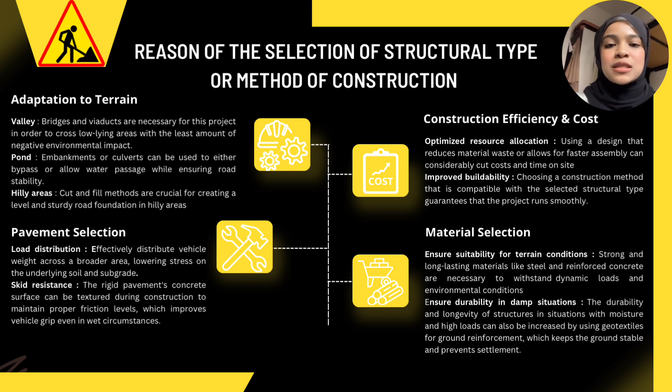Other than that, skid resistance. Skid resistance refers to the pavement surface capacity to provide enough friction to avoid vehicle skidding, especially in wet weather or in regions prone to water collection, such as around pond crossings along the alignment. The rigid pavement concrete surface can be textured during construction to maintain proper friction levels, which improve vehicle grip even in wet circumstances. This is especially important in the valley and hilly areas of the highway, where curves and slopes heighten the risk of skidding.

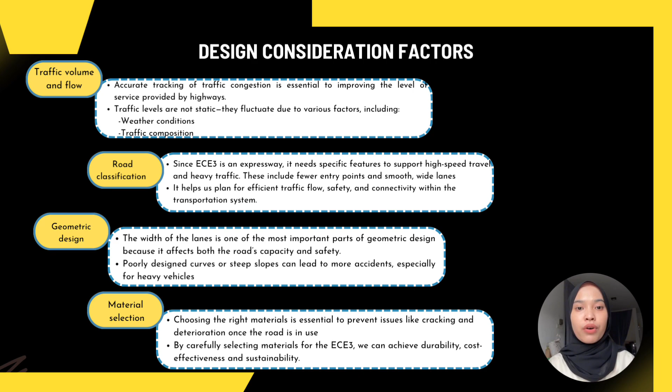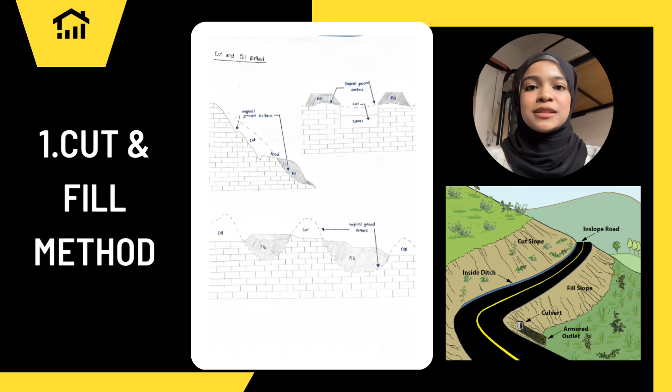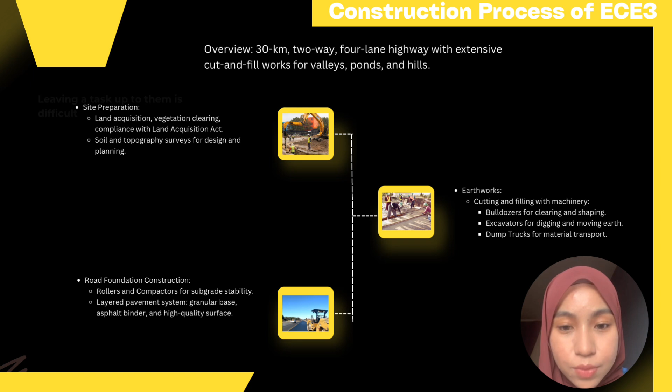Number 3 is road foundation construction. After earthwork, the focus shifts to the road foundation subgrade preparation: compact the soil for stability using rollers to achieve the required density and compactors to prevent settlement. Then a layered pavement system is built, including a granular base and asphalt binder for strength and a high-quality asphalt surface for smooth and skid-resistant driving.

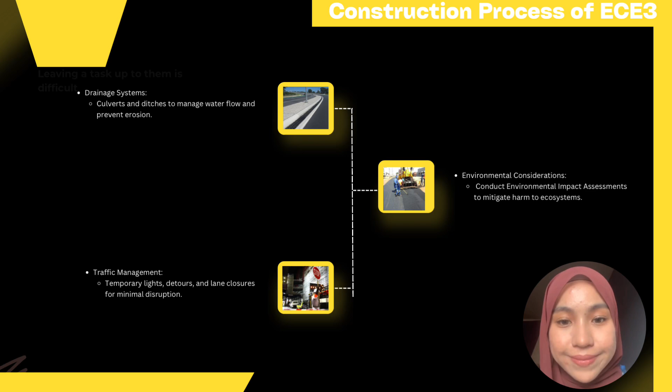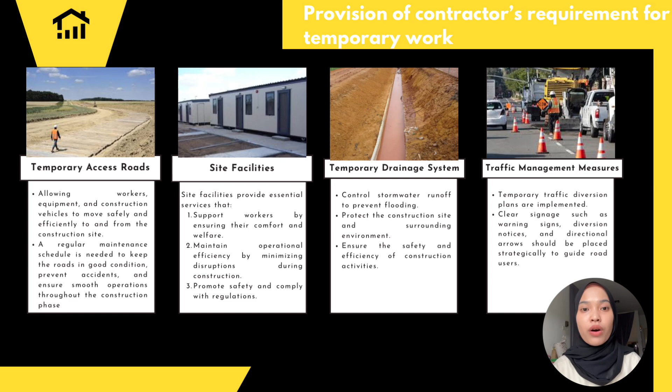To ensure safety and traffic flow, physical barriers like concrete blocks or water-filled barricades are used to separate work zone from traffic lanes. Speed limit around work site must be enforced and prominently displayed to prevent accidents caused by fast-moving vehicles. Flag workers also need to be stationed at key locations like junctions or busy areas. These workers also must wear reflective vests and be trained in traffic management. Communication devices are also essential to keep the flow of information clear and effective.

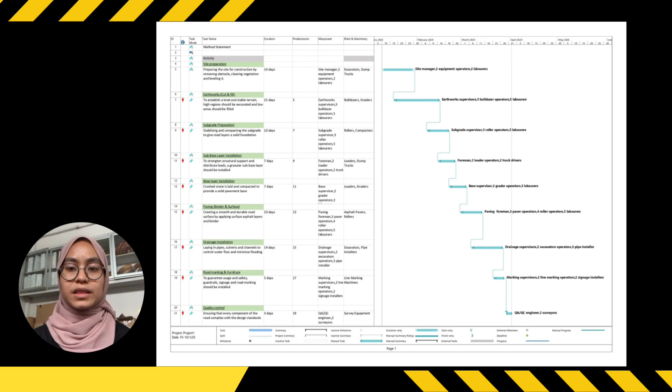Moving on to the method statement, this section outlines the step-by-step approach to execute the construction activities safely and efficiently. It specifies the techniques, equipment, materials, and safety measures to be used for each phase. The key steps in the method statement for this project include preparation, which mobilizes resources, establishes site access, and sets up temporary facilities like worker shelters and storage areas.

The second one is excavation and earthworks, which uses heavy machinery to perform cut and fill operations while ensuring compliance with safety protocols. The third one is foundation works. This involves constructing the subgrade using compactors and rollers, followed by placing reinforced concrete for stability. The fourth one is drainage installation, which installs the drainage channels and culverts, ensuring proper alignment and slope for effective water management. The last one is superstructure construction. This involves erecting bridges or viaducts in valley areas and stabilizing slopes with techniques like shotcrete or soil nailing.

In conclusion, the work program and method statement provide a structured roadmap for completing the project efficiently and safely. By following these detailed plans, we can ensure timely delivery, maintain quality, and meet safety and environmental standards.

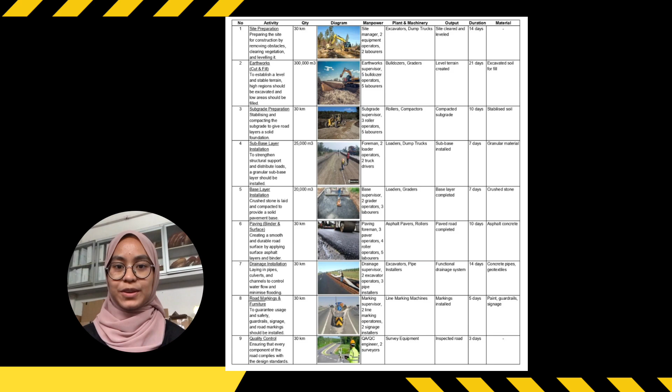In conclusion, the East Coast Expressway 3 or ECE3 is a massive infrastructure project that faces significant challenges due to its diverse terrain of valleys, ponds, and hills. The success of this project depends on efficient construction cost control and compliance with safety and environmental standards. Using advanced technology like building information modeling and drones ensures better collaboration, reduces error, and shortens project timeline. These tools also contribute to sustainability by minimizing material waste and promoting environmental compliance.

For recommendation, to achieve the project goals of ECE3, we recommend the following. First one is detailed terrain analysis: conduct thorough geotechnical studies to guide material selection and design for stability and durability. And second one is adoption of advanced technologies like BIM and drones to enhance project efficiency and accuracy while reducing timeline. And third one is sustainable material selection. Choose durable materials suited to each terrain type, such as water resistant material for pond areas and reinforced concrete for bridges. And the fourth is traffic flow consideration.